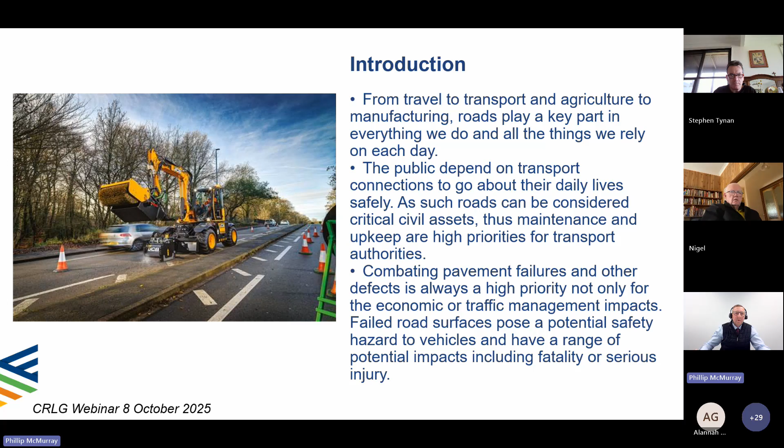Combating failures and other defects is a high priority, not only for economic and traffic management impacts, but also the safety aspects. You leave a road to go into disrepair, and it can cause a fatal or serious injury. So we've got to make sure that we keep our eye on it and manage this asset effectively.

Levels of service - the question there is, most local governments approach the replacement and renewal of assets probably not on a consistent basis, and it all depends on where you are, what networks you're looking after, how much income you've got coming in. So there's not a one size fits all, but there's some best practice principles that I think I'll touch on that you should be aware of in your particular areas.

Roads are a dynamic asset, and I say that in the fact that it's highly affected by the environment. Wet and cold and dry conditions can make an absolute mess of a road environment with little time. So you might be on top of your road network, and then all of a sudden you get major rain and flooding events, and your asset can deteriorate really quickly, and it can cost significant money to bring it back into repair. So it is certainly a dynamic asset.

Generally, from a financial perspective, council roads are consumed at a higher rate than we're renewing them. That's no surprise - we just don't have the money to be able to keep on top of the depreciation, and hence our assets are probably across most council areas deteriorating, which isn't a good thing, but we need to ensure that we look after them as best we can, so we don't get ourselves into a pickle where we're having to chase millions and millions of dollars, which we don't have.

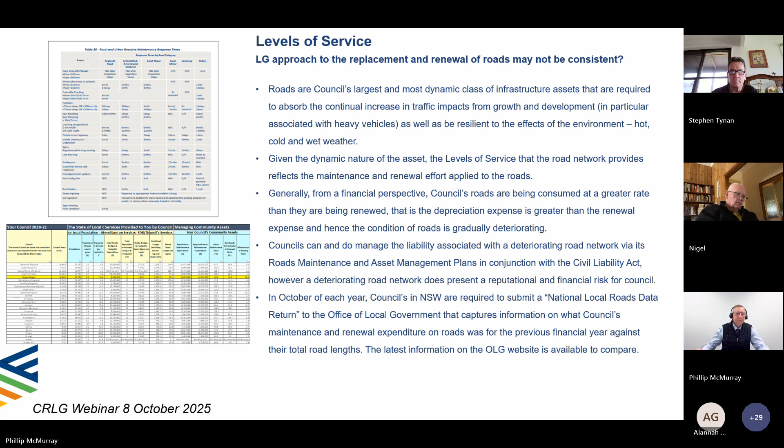Road hierarchies. I guess most rural councils generally categorise their roads as either state, regional or local roads. State roads are generally maintained by the state in New South Wales, Transport for New South Wales, or they do it under a contract to councils. So all the money flows from state government.

Likewise, regional roads are generally under the care and control of the council, but are topped up with funding from the state government, because of the prevalence of regional roads joining towns and cities across the country. And local roads are the remit of the local government area themselves. On the left-hand side, you see the road hierarchy that is in place for Wagga City Council, which is the last council I worked in.

Wagga's road hierarchy is made up of regional roads, sub-arterial road, collector, major, local, laneways, urban roads. They do that through their built form city areas, so you can see the roads that network around their particular city. But generally, rural councils keep it a little bit simpler.

Councils carry out proactive network surveillance using a road network inspection, and their surveillance methods help councils determine the priority for maintaining programs. For example, you might on your councils have reseal programs, crack sealing programs, renewal programs. So you're probably dealing with budgets where you've got pavement rehabilitation, heavy patching programs, gravel resheeting and the like. We're going to go into a little bit of detail about what all that means,

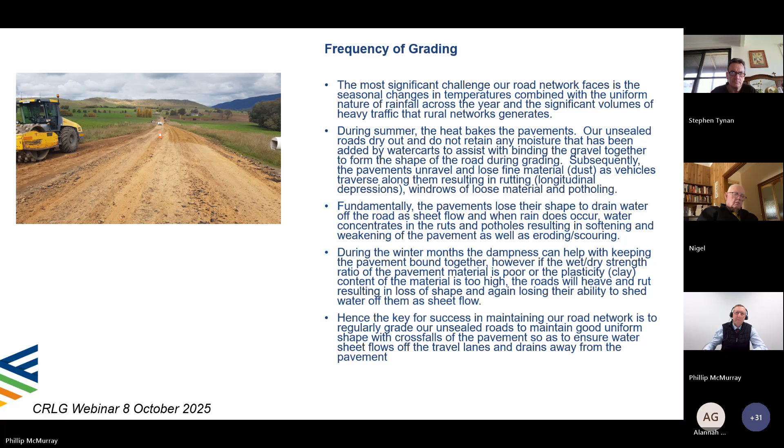In terms of sealing, again, weather plays a significant part. During the hot summers, bitumen oxidizes and starts to become a little bit brittle, and hence cracks can form in your pavement. Once water gets in... the idea of a bitumen seal over a pavement is to completely waterproof it. As soon as you've got a gap that allows water into it, it weakens the pavement underneath, and potholes start to form. So during the winter months, water ingress into the pavement, I guess, exacerbates that.

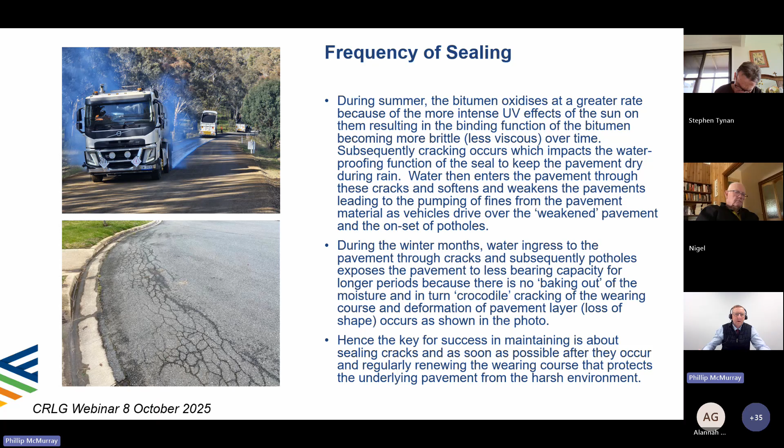You get crocodile cracking. You can see at the bottom left of your screen what we typically call crocodile cracking. So it starts to lose its shape, and that's where your failures start. The success of bitumen seals lies in getting to those cracks straight away, so doing some crack sealing activity, or placing a new wearing course over the top, which is your bitumen resealing programs. So the idea is to make those pavements watertight. Once those pavements have failed, you've got to get in there and do your resealing and your crack sealing to make sure that the water doesn't get in and damage the pavements any further.

The costs of grading. These are broad brush, and there's lots of factors that contribute to the costs, but generally you'll find that doing maintenance grading is fairly cheap. It's about $2,000 per kilometre, and that's based on having a grader, roller and water cart, and they can generally achieve about 3 kilometres a day, so you can get quite a lot of work done with a small crew.

What I would say is, in the past, lots of councils have probably gone down the track of sending graders out to do rural road maintenance without any water and compaction equipment with them. What I've found over the years is it gives a false economy. You get a cheap job done quick, but the road doesn't stand the test of time. If you take a roller and water cart with you and put it down properly, the road's likely to last 5 times as long as if you were just stirring up the bull dust with just a grader. So having your processes right is critical.

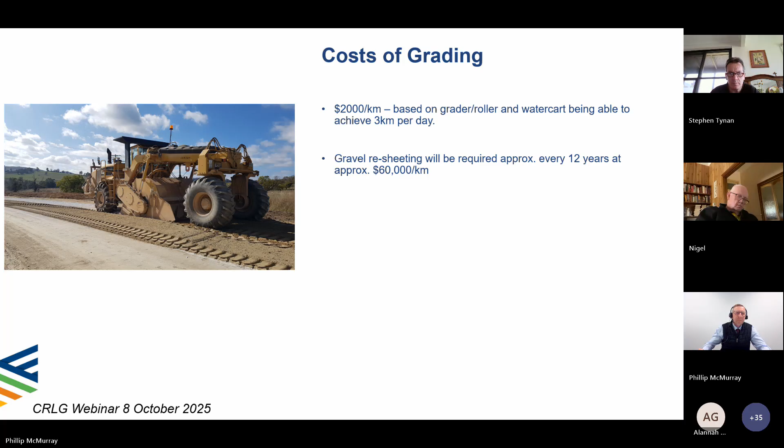Gravel resheeting will be required probably every 12 years. So eventually the material wears down over time and loses all of its fines. So you've got to resheet, and that's about $60,000 per kilometre.

One of the questions has come up in the chat. My costs are just based on a little bit of experience. They're approximations, and it's pretty hard to come up with a national cost structure. There are some estimators that probably have those types of costs in their annual books that they put out. But the costs that I'm putting up today are just the costs that I've been exposed to when I've done contract work around my particular council. So no national costs, just known costs that I've been dealing with at a practical level.

Cost of sealing: a single coat seal costs approximately $12 a square metre. And a double coat seal, which is a spray seal with a stone and then another spray seal over the top of that with a smaller stone to lock up the voids, gives you a better finish and costs about $18 a square metre. Now, if you have a typical rural road with a kilometre length, approximately 8 metres wide, that gives you a sealing cost of about $96,000 for a kilometre section.

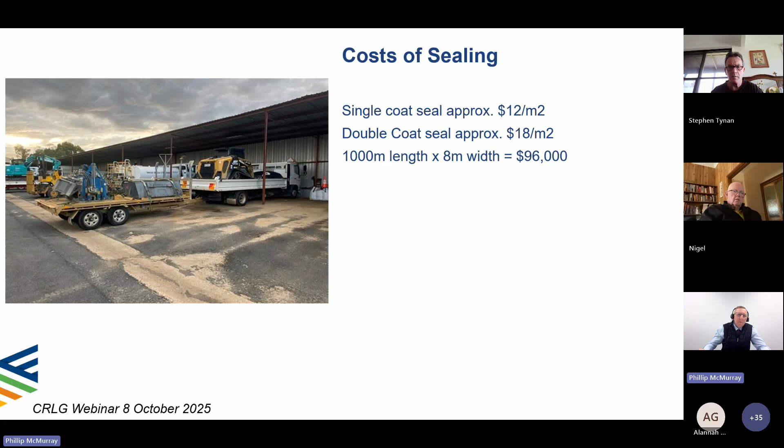When we talk about the cost of construction, if you let your bitumen seals take water in and your pavement fails, my key message is the cost to repair a road from scratch to replace the pavement underneath, as opposed to just doing the resealing, which buys you another 12 years of useful life, you're probably going to pay at least 10 times the cost of a reseal, or $1 million per kilometre.

So my advice to any councillors and general managers is, if you're looking to cull road programs, stay away from your resealing programs, because your resealing programs are a very cheap, effective way to keep on top of your budgets. There have been examples in rural New South Wales in the past where councils have chosen to reallocate monies away from their resealing programs, and what they've found is it's cost them millions of dollars later on to go and rehabilitate the pavements underneath. So it's a really key thing to take away from today's session.

In terms of rural road maintenance too, if you don't grade your roads, the rutting, the potholing that forms, the water sits in them, you will lose the quality of your pavements underneath, and then it becomes an expensive exercise again to maintain that asset.

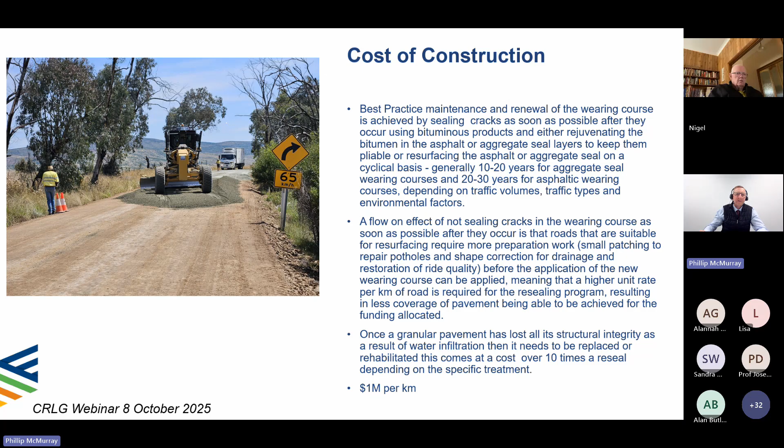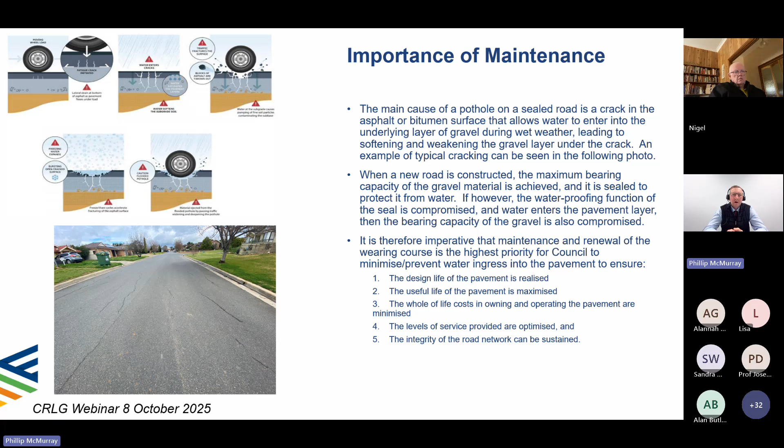So it's imperative that the maintenance and renewal of the wearing course is your highest priority for council. That's going to ensure that the maximum pavement life is realised from the pavement below, and you're ensuring that the whole of life costs of that pavement are minimised. You're ensuring that the level of service you're providing for your communities is high, and you're ensuring the integrity of the network.

In terms of managing community expectations, Wagga Council, my last employer, used a risk-based defect priority scoring system where they go around inspecting the roads, collecting data with handheld software, identifying where there's cracks, where there's failures in their road pavement, and then being able to send out their crews to restore the road.

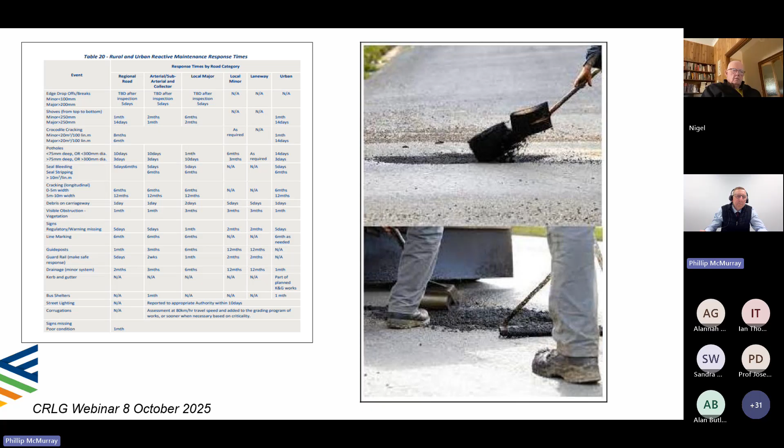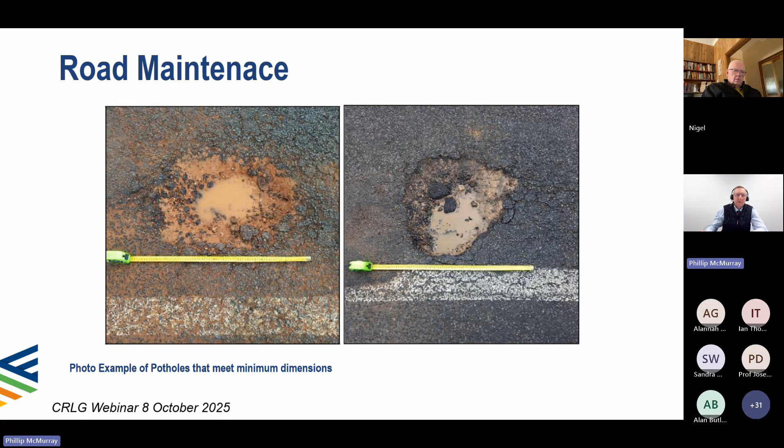The photos on the right are typical, showing a cold mix or a hot mix seal, which is what we call throw and go. They bring black bitumen that has stone within it, at a viscous level that allows you to work it into the holes, and they roll and tamp it into the holes. The photo there is of a typical pothole that meets those requirements to intervene at Wagga City Council. So your asset inspectors pick up on these defects, you record them and then send the crews out to fix them.

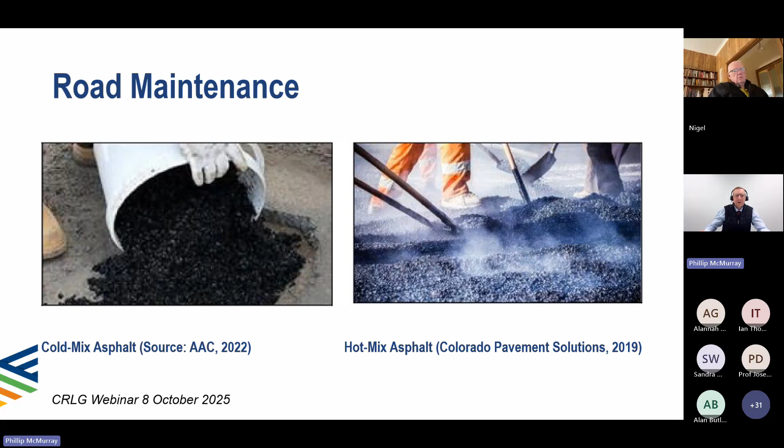What that machine does is it spits out that emulsion and fine stone mix. We got a lot of complaints, I guess, at Wagga Council that the material wasn't lasting as long as some of the cold mix patches and the like. But when your road's falling apart after major rain events, this technology allows you to get out there and fix and restore the roads so that they're in a safe condition quickly, and it's really cheap.

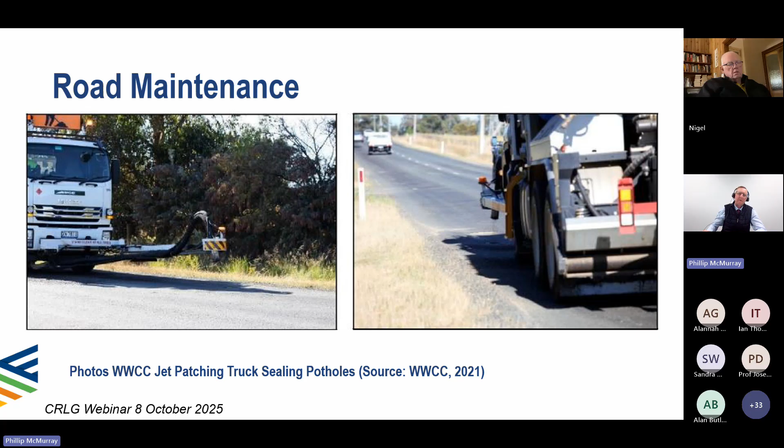But if you cut the patch out and spend the time getting the edges right, it's probably about $600 per hole, about 10 times as much as what this machine does. So this machine allows you to get round and keep your road network in check, particularly in adverse weather conditions, and they're a very reliable, good way to do road maintenance.

I'll just finish up with a few recommendations. Each year there's a shortfall in road maintenance and renewal funding for maintaining our road networks. This leads to deterioration of the networks, and therefore you've got a funding gap. All councils are dealing with this. There's no simple solution, but as practitioners, we're always recommending alternate funding streams be identified and implemented where appropriate. These could be special rate variations, additional grants, diverting revenue, looking at any realistic alternate funding streams.

Not easy, hard conversations to have with your community. There's priorities all across our council areas. But because your road network is probably your biggest asset class to manage, and it's so adversely impacted by weather events, if you don't keep on top of it, you could find yourself in significant financial strain. So having available funding to throw at your roads is a good thing.